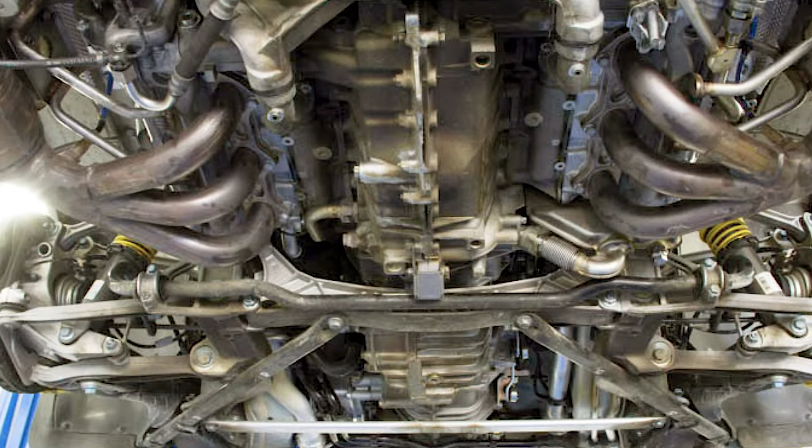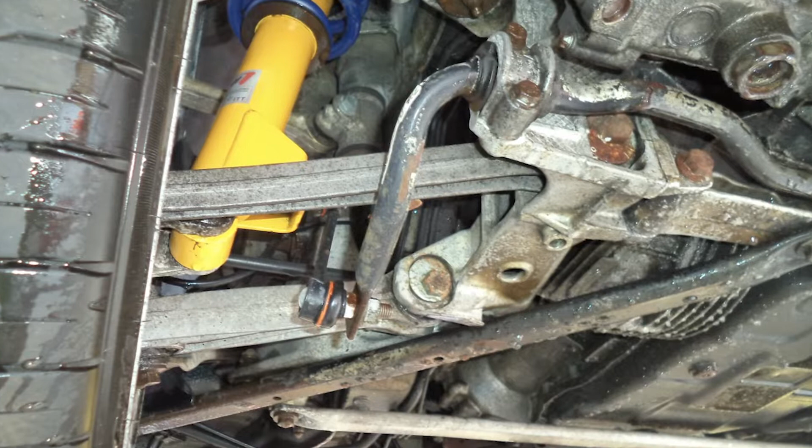I don't know what you think when you look at this picture, but for me, the first time, it was clear as mud. I mean, I could pick out a couple of things, shock absorbers and stuff like that. Before I started jumping around under the car, I wanted to go over what the different parts are and where they are. This really helped me understand what the parts do and how I'm supposed to get them off. In general, the engine comes out the bottom, and so anything that's underneath the engine has to get taken off.

So if you imagine here is just a regular old car and it has a chassis. And the chassis is made up of two main things. You got the frame rails. There's a frame rail on the passenger side and a frame rail on the driver's side. And then on that you have subframes. And the rear subframe is the one that we're interested in.

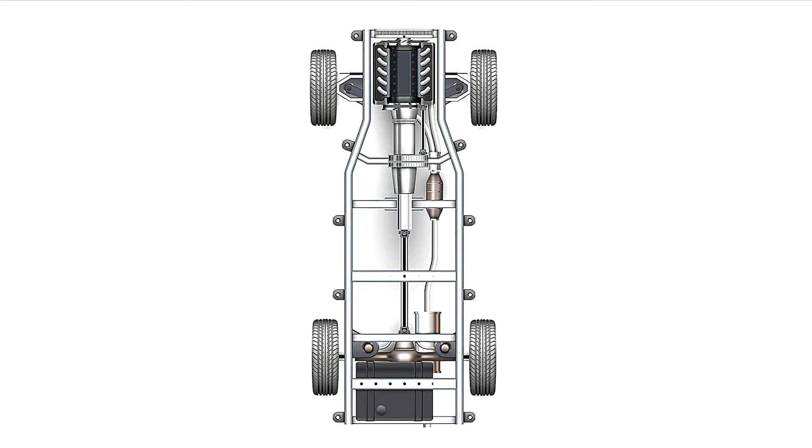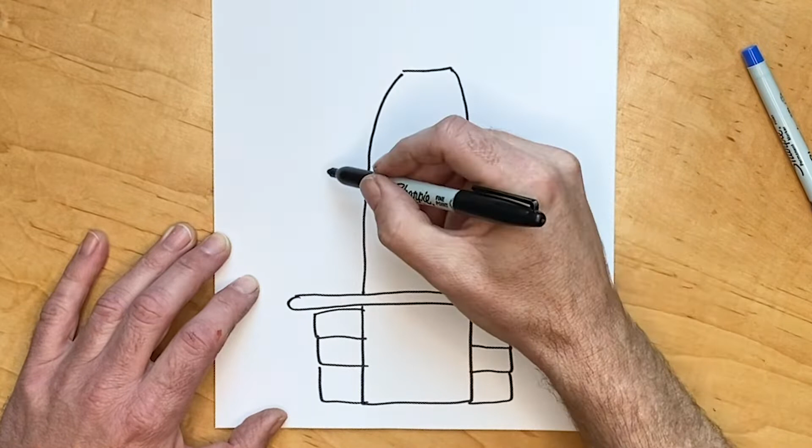So at the back of the car on the Porsche we have a bar going across just like that. Behind that is mostly the engine. As we spoke about before, the crankcase with the 3 cylinders off to each side. And then mostly in front of the rear subframe is the transmission. Next up is the reinforcing brace. We'd already taken that off in episode 6, step 7, right before we took off the middle coolant hoses, so that one was done already.

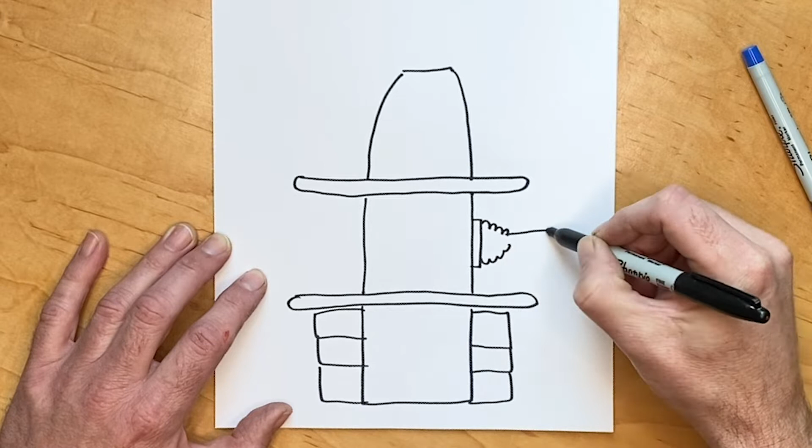Then we have the axle shafts that are bolted onto the sides of the transmission by these CV joints inside these boots. The construction of the CV joint is pretty complex with all those ball bearings, but it's kind of like a U-joint. It just allows the transmission to put the power to the wheels, but also allows the wheels to bounce up and down if they need to.

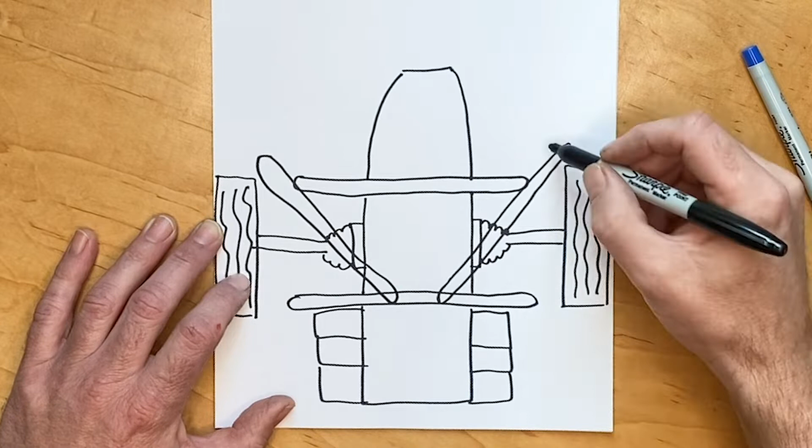Then comes the rear axle cross brace. These are two pieces of metal that go at diagonals from one side of the car to the other. At the very back, they join to the subframe, and then at the front, they join to the body of the car, but underneath those plastic side wheel trim parts.

Then on the very top front right of the transmission is the reverse light switch. Then a little further back are the gear selection levers. On the driver's side of the transmission, just above the drive axle, is the clutch slave cylinder. And finally, at the back of the car, between cylinders 5 and 6 on the right-hand side, is the ground strap.

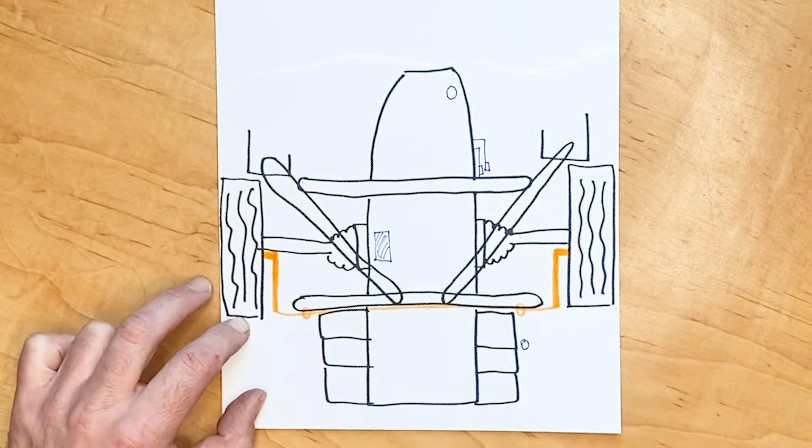Would you like your car to handle less like this and more like this? Then you need a stabilizer bar or a sway bar. This is a thick piece of springy metal that on the Porsche is attached to the bottom of the shock absorbers and then is also bolted to the rear subframe to provide stiffness to the rear suspension.

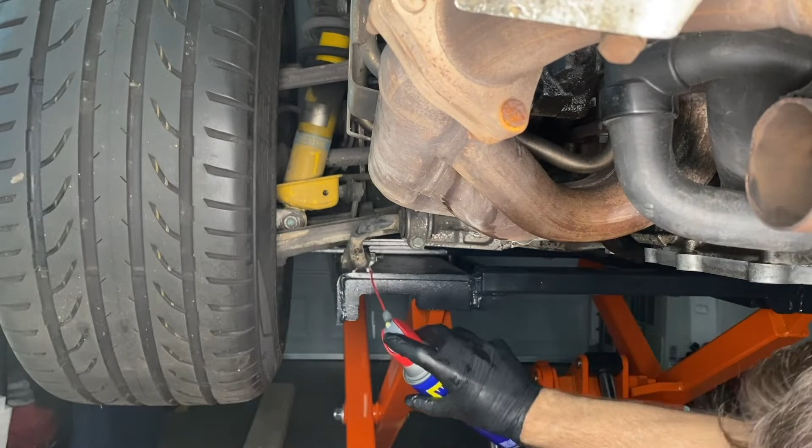To take off the rear stabilizer bar, of course we're going to use more WD-40. I promise to stop mentioning that, just assume it from now on. You need 2 wrenches. You need a 15mm on the actual nut and then a 17mm open wrench to hold the other side of that nut so you can wrench on it. And then the stabilizer bar is held on with these clamps onto the rear subframe, and those are 2 13mm bolts, as everything on this car seems to be more or less 13mm.

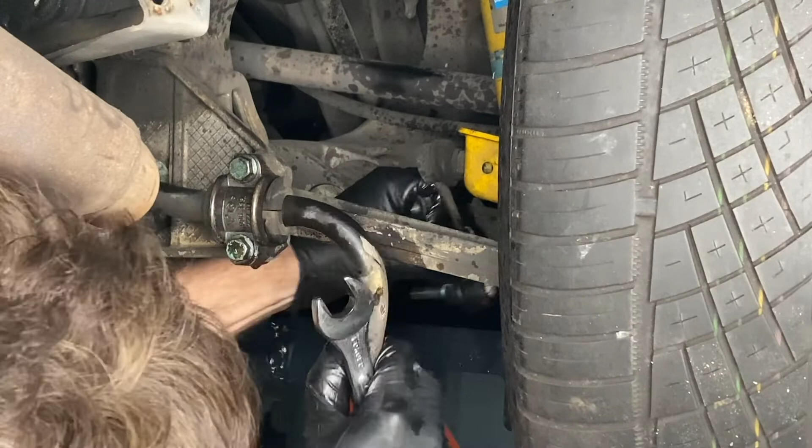Then moving over to the other side, same old thing really. That is the sway bar link that is attaching it to the shock absorber. And then once they're all off, it did just pop off very easy. That was an easy thing to take off.

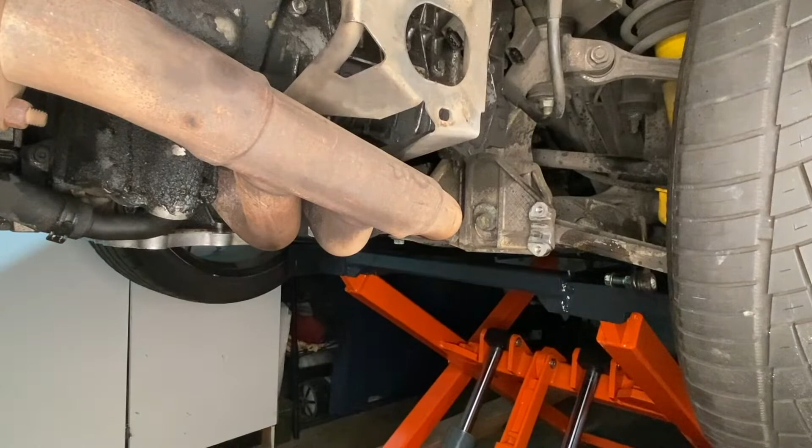Next we have those plastic rear wheel trims. They're in the front of the rear wheel arch. You have to pop them off first, and then we're going to use that access to be able to get to these small plastic trims at the bottom of the wheel arch. You're going to use a T30 star drive to get the front one off. Then there's one in the back as well.

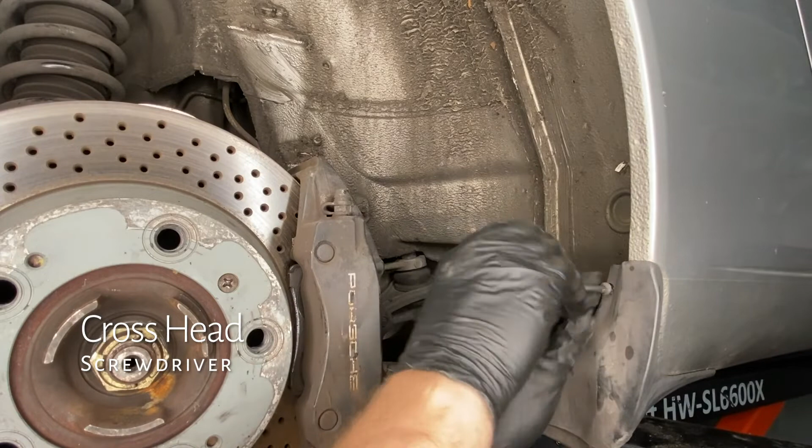There is a third one underneath there, but we took it off in order to get the rear under tray off. And then there is just one crosshead screw in the back there, and it does come off. And the lift and those pads don't make any difference. It comes off no problem.

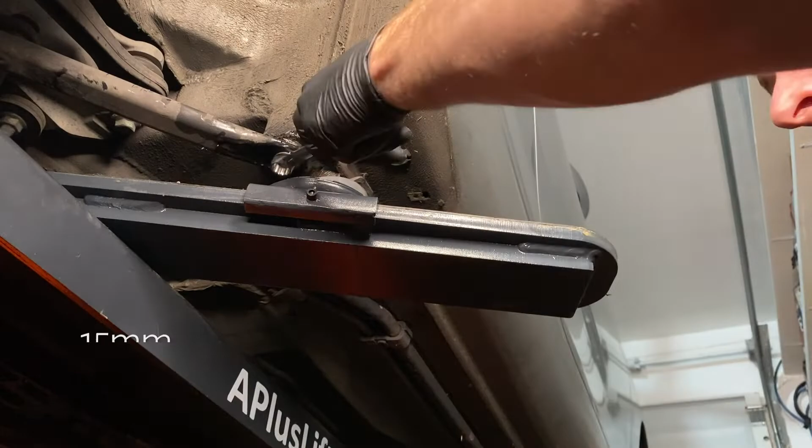Now that we have that plastic molding off, we do get access to this 15mm bolt, which is the front part of the rear axle cross brace. Taking that off was relatively easy now with that plastic piece off. I did come across a problem with the scissor lift pads. They were a little too much in the way to be able to get those nuts all the way out, so I left them for now and I'm going to come back.

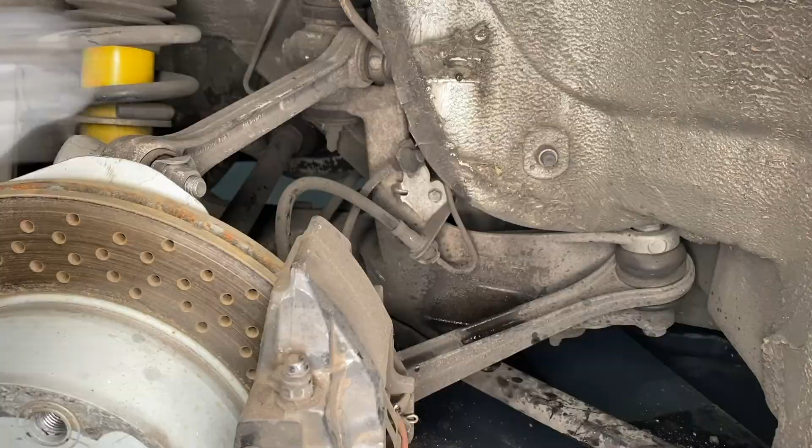Then in the middle of those cross braces there was another 15mm bolt, and then at the back on each side there is a 16mm. My electric wrench had trouble with that, so we had to get the big hammer out again to give that a little encouragement, and then that did come off okay.

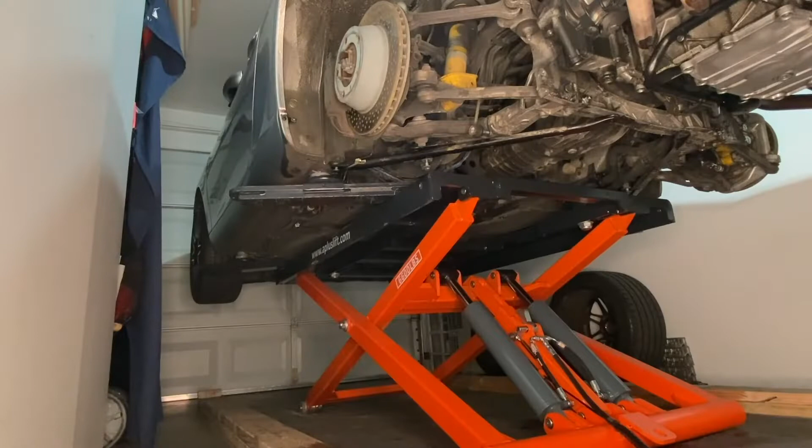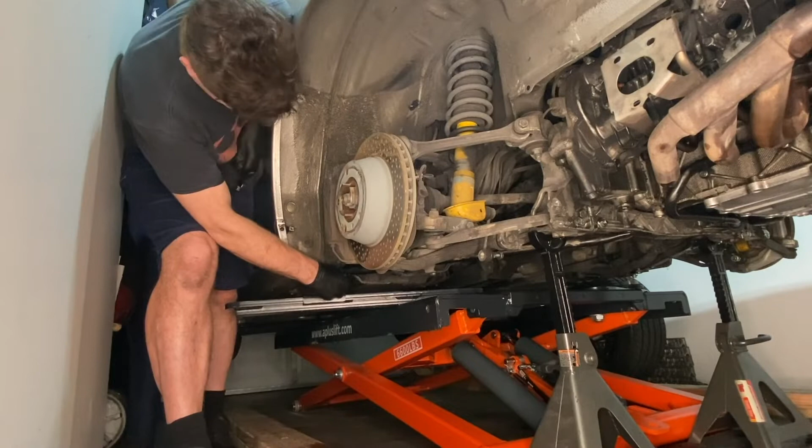And then here was my plan to be able to get those front bolts off. I lowered the car onto some axle stands, and then as I lowered it further, it made the front do a little bow, and I was able to get those bolts off each side pretty easy, and there's that cross brace coming off as well. So I was kind of stressed out about that, but in the end it did work out just fine.

And here comes the lower subframe that we talked about at the very beginning of this video. I apologize that the camera, of course, did focus on the exhaust manifold in the center, and so the subframe is a little out of focus. Here I'm using an 18mm wrench to loosen those front nuts, but then you do need an 18mm on the front and a 16mm on the back to be able to get those to come undone. In the end, not too bad. There's just 2 on each side.

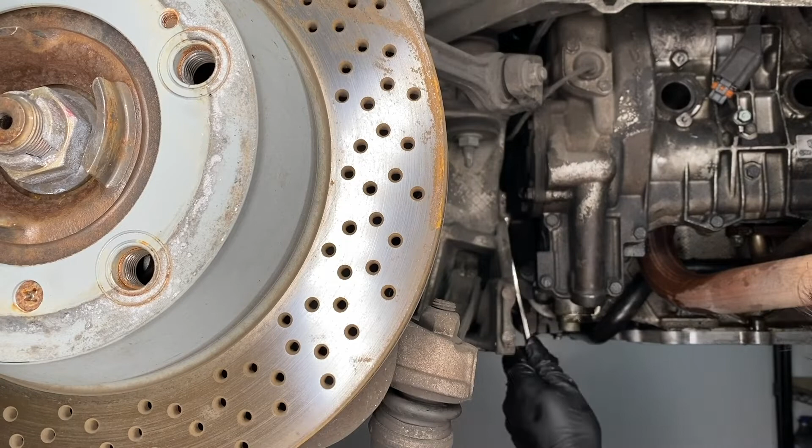I hammered them out with a combination of tools, and then looking on the other side here, same thing really. Once I got them all loose, trying to get it out was a little more challenging. It did seem like the exact right size to slot out, and it was, but the technique in the end was to push it back up, lubricate the whole thing with WD-40, of course, and then I used the plastic hammer once I got it all completely lined up just to tap it out, and then it came out no problem.

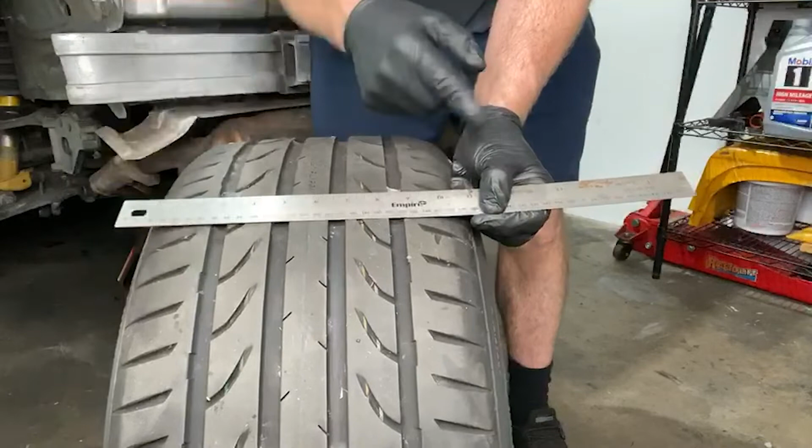With these rather meaty tyres off the car, it's a good time to talk about tyre size. The numbers here say 285, 35, 19. So those numbers refer to the size of the tyre, and 285 means that this width here is 285 millimeters, which is between 11 and 12 inches. The 35 means that 35% of that is this tyre wall size.

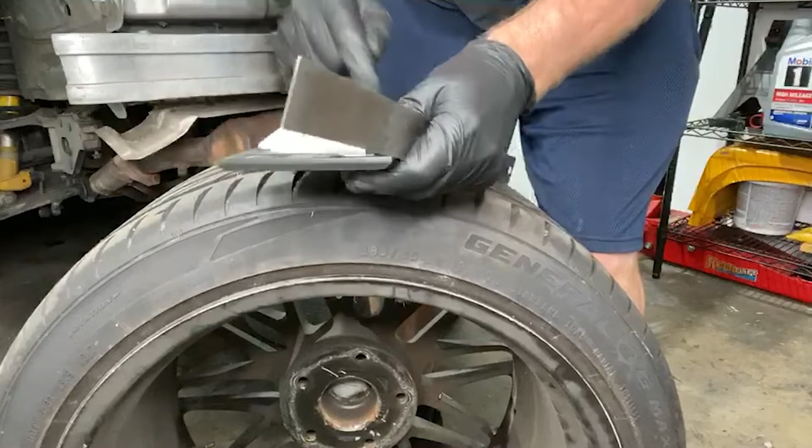So if you take a calculator and do 285 times 0.35 equals, you're going to come out with 99.75 millimeters, which right here is 100 millimeters, which is pretty much that number. And you can see that the tyre wall, including the tyre wall that goes into the rim, is 100 millimeters.

The ground strap was next. That's between cylinders 5 and 6, bank 2, which is on the passenger side, 13mm of course, a very easy job to take that off.

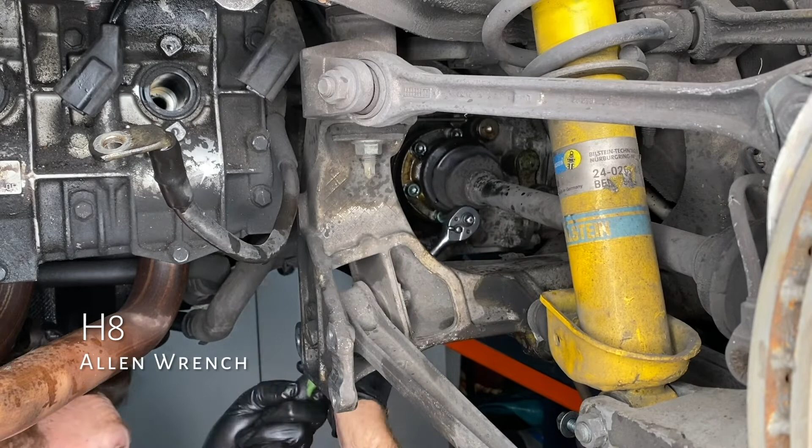Next up is those CV joint mounting bolts. This one did actually fill me with a little bit of terror. I was expecting to have to undo a few and then go into the car, lower it, turn the axle a little bit to gain access to the other ones, but no. Porsche, in their infinite wisdom again, left plenty of space. You don't have to rotate anything.

You just get that Allen wrench, the H8 Allen wrench on there, and go at it, and they all come off. They didn't come off enough. They kind of sort of stick against that rubber boot. That's enough to get them all loose, and then once you do get them all loose, it does pop off very easy. But here's my recommendation: don't take them all off.

Loosen them all, but leave 2 of them, maybe 3 of them, in there a few turns, and that's going to help you take the other side off. If you take all of them off, the other side rotates too easily, and so that is my tip of the day.

Next then was the shift cables. It was kind of awkward. You can see I dropped one off there after squeezing it with the channel locks. I don't know if there is a better way, but the channel locks did work to get the clips off the one end.

Once you get the clips off that allow the cables to come free of the chassis of the car, you need to undo the very end of the cables that go onto these little metal balls. I tried the crowbar and that didn't really work at all, but in the end, just a chunky flathead screwdriver was all you needed to get those gear shifter cables off.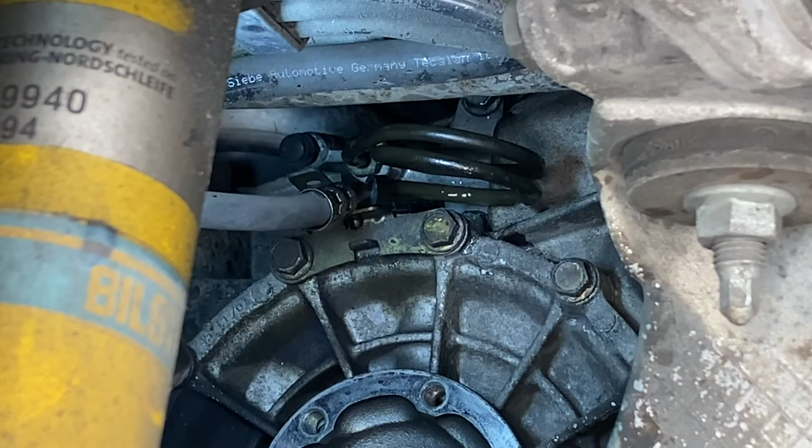All right, this next one did fill me with fear when I heard about what we're supposed to be doing here. It is the clutch slave cylinder. What we're looking at here is right above the driver's side drive axle. If you're trying to find the slave cylinder, there's a blue pipe on that side of the car. If you follow that blue pipe all the way along, at the end is this slave cylinder.

On the top of the clutch slave cylinder is a 13mm bolt. It was pretty awkward, but I did undo that. Underneath it, by bending up those metal coils, I did actually get another 13mm in there for the second bolt. Once those two bolts were out of the way, you could actually see it. That little thing there is what actually engages or disengages the clutch when you press the pedal in the car.